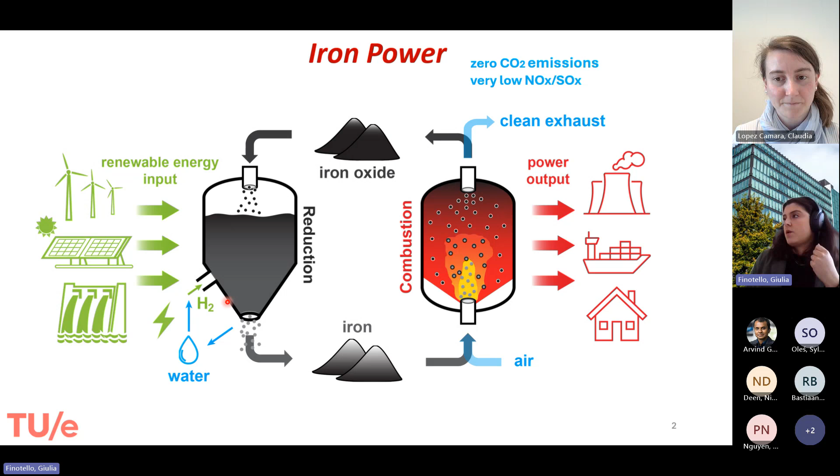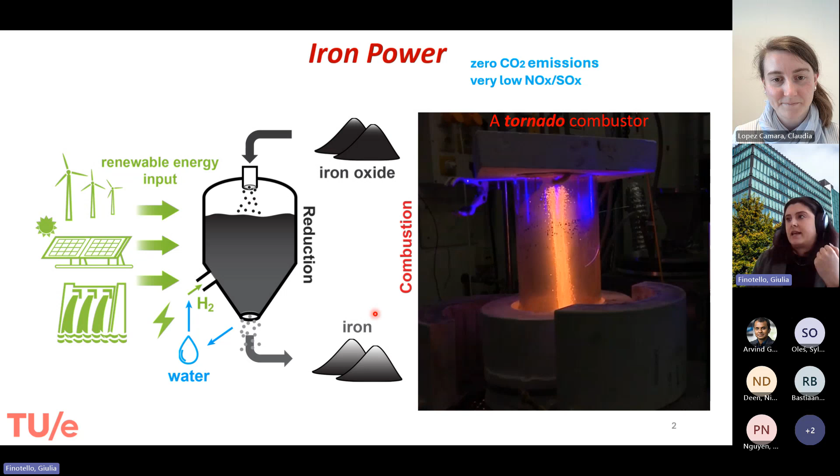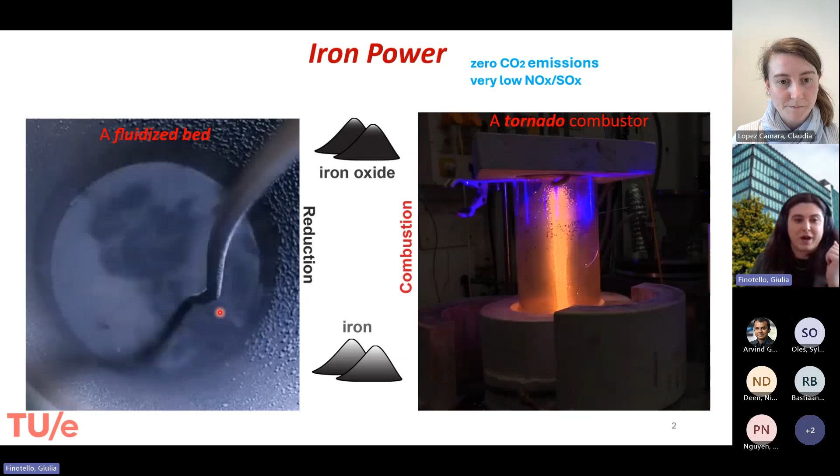So from my colleagues, I just show a picture here of a very beautiful tornado combustor that they developed. And then here for the reduction side, you can see at the top of a fluidized bed, what you see is this bubble that is the gas coming through the particles. So the particles are mixed, and the heat and mass transfer is enhanced by this mixing and this motion of the bed. And what you see here is just the tube for the thermocouple into the reactor, nothing strange.

Okay, and what are the key benefits of this iron power? As I said, we see it as a sustainable energy carrier because especially for iron, we can release chemical energy, but we can also collect back the powder in the solid state so that it can be regenerated. So that's really used as a sustainable energy carrier. As I said also before, we have no direct CO2 emission.

And we can produce heat for industrial processes due to the fact that iron has a high energy density. Another component of this cycle is that it's a circular process. We know we've seen this is a cycle, but it's actually something that needs to be demonstrated, which I will talk about in my talk later on.

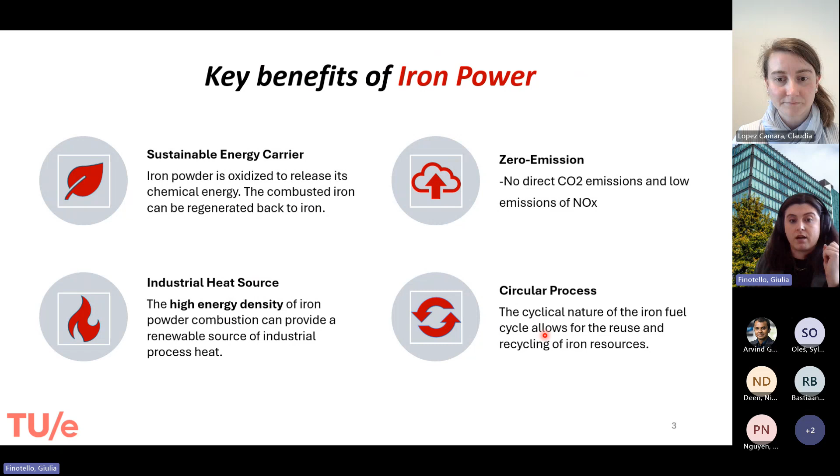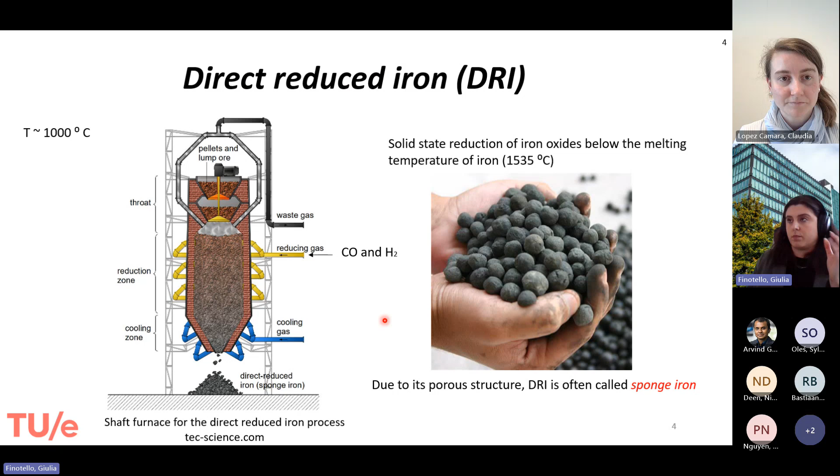Let's get more into the reduction processes available. We know already from the steelmaking industry about direct reduced iron. This is done in a shaft furnace, where we have solid state reduction of iron oxide. In these very large facilities, pellets and lump ore are introduced, and the reducing agent can be hydrogen or a hydrocarbon mixture with CO and hydrogen. Temperatures are relatively high, and what we produce here is direct reduced iron, or sponge iron, called this because what you produce is a very porous iron ore—you can even see larger cracks in the picture. So it's very porous. This is indeed one of the techniques used to regenerate mostly larger pellets.

Here I give an overview of all the current steelmaking technology solutions available. I'm not discussing the very low TRL niche technologies for now. This overview puts all these alternatives together—we have the shaft furnace here, and the technology readiness level here, together with other properties. What's important to see is that while the shaft furnace is already widely used and has a high technology readiness level, below we have fluidized bed reduction, and then three other techniques: suspension iron making technology, which occurs at very high temperature so the reaction can go very fast, but has a lower technology readiness level. The same goes for plasma reduction and electrochemical reduction—these have much lower TRL than fluidized bed and shaft furnace.

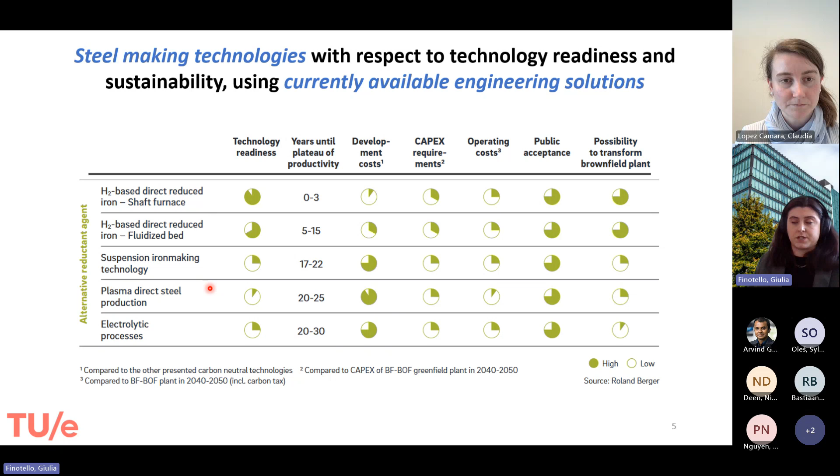If we look at all these technologies, there are of course pros and cons, and we will look at these for each. What you see here is these technologies put in perspective of increasing temperature—if you increase the temperature, your reduction rate increases, so you can do reduction faster. You see here we pass from reduction times of days to milliseconds, so the reduction time decreases a lot. If we look at energy efficiency and reduction rate, we can think maybe there is an optimum technique. However, it's very difficult to identify such an optimum, and if we tend to exclude one of the techniques, we limit our possibility to really explore what we can do to regenerate iron oxide, both for the iron cycle and the steelmaking industry.

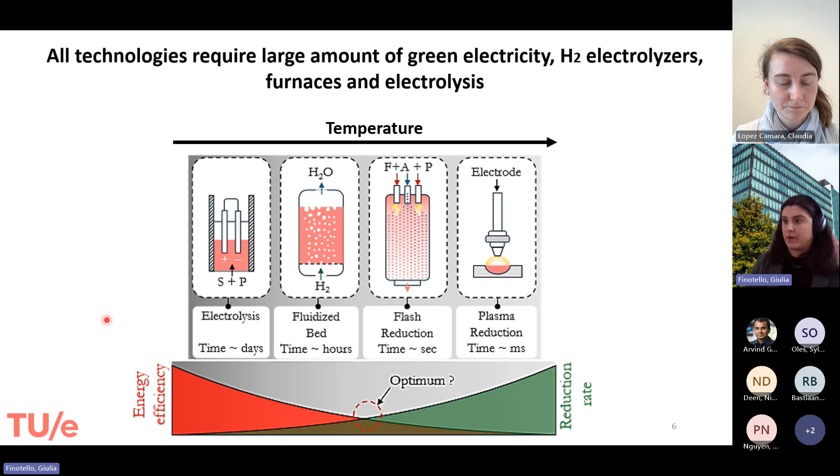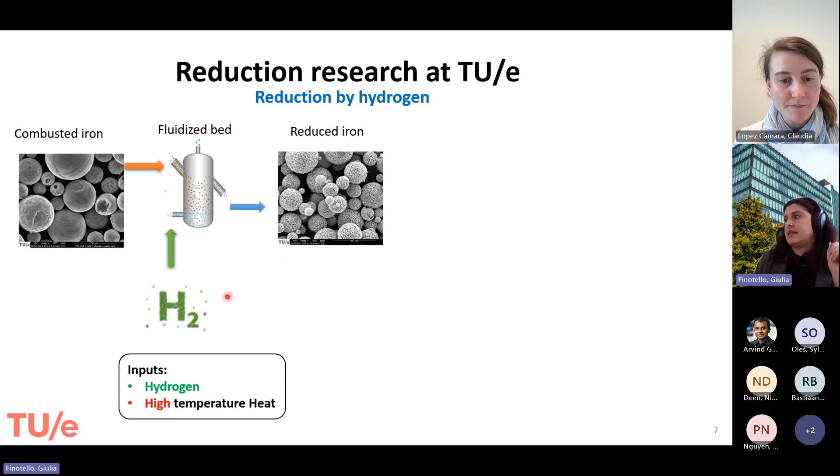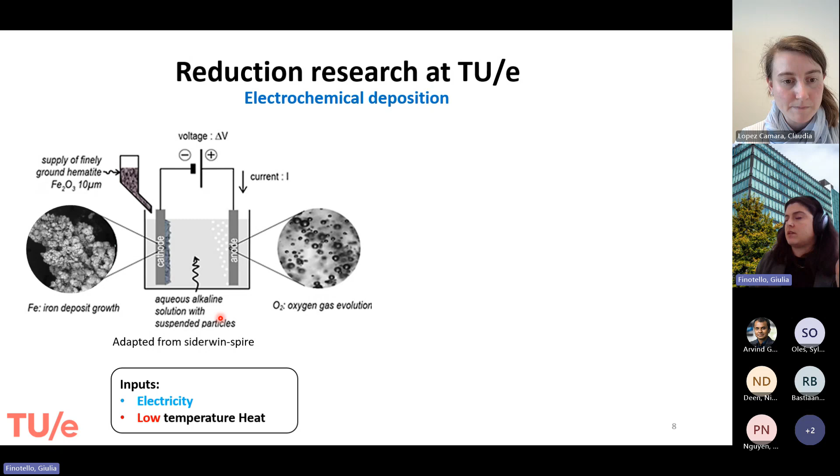However, we are also looking into electrochemical deposition—a totally different technique. An alkaline solution with suspended particles is used, and with an electrochemical process, you have deposition of iron at the cathode. The typical iron deposit has this crystalline structure. In this case, you don't need any hydrogen, but you need electricity and low temperature heat—we don't go above 100 to 110 degrees because we don't want evaporation of the aqueous alkaline suspension, which I'll touch on later. We're doing this in a parallel plate, a very simple but effective electrochemical cell, and we're also developing rotating disk continuous reactors to help with scale-up.

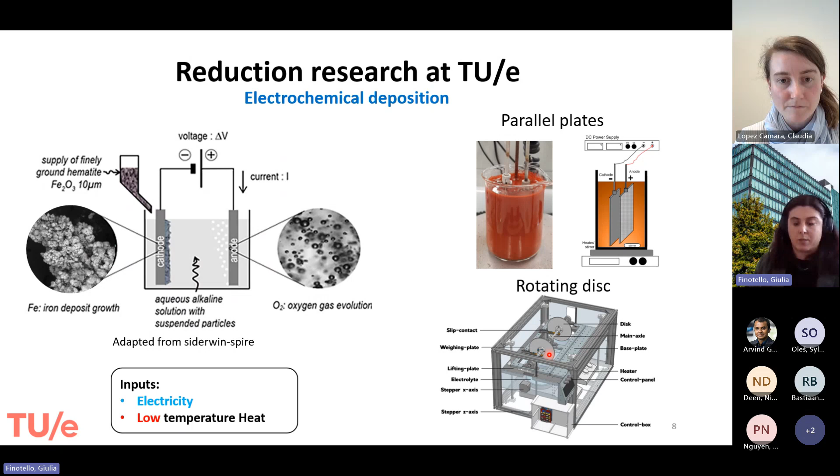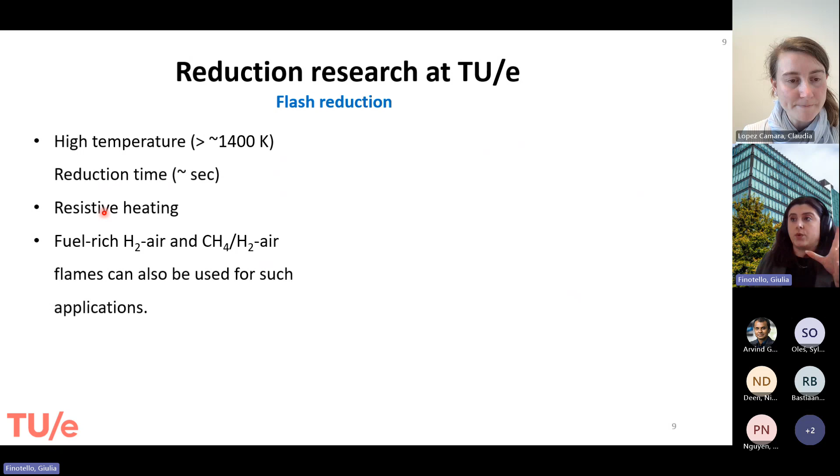We also started very recently with my colleague Giulia, the flash reduction process, which occurs at very high temperature, where you can reduce the reduction time to a second. We can do it with resistive heating. Indeed, we are developing a drop tube reactor with resistive heating, where we want to do very controlled experiments to look into the kinetics of reduction at such high temperatures, which are still very much unexplored.

Potentially you can also do it with a hydrogen-air or methane-air hydrogen flame to reduce that. What you need, of course, is hydrogen again and very high temperature heat.

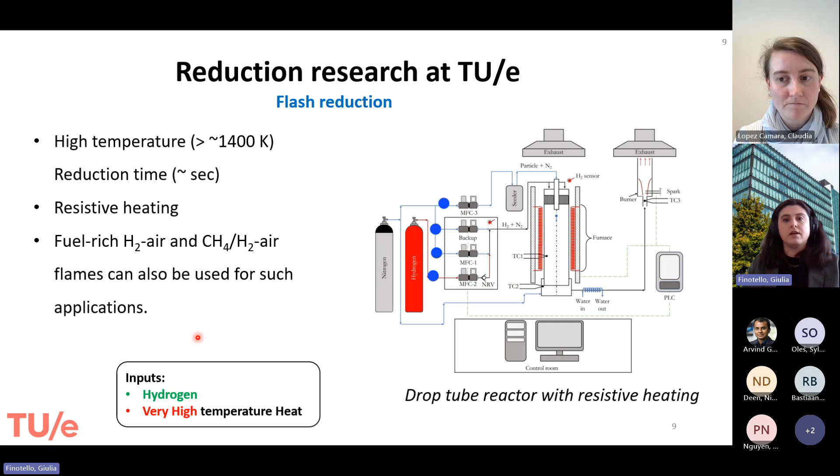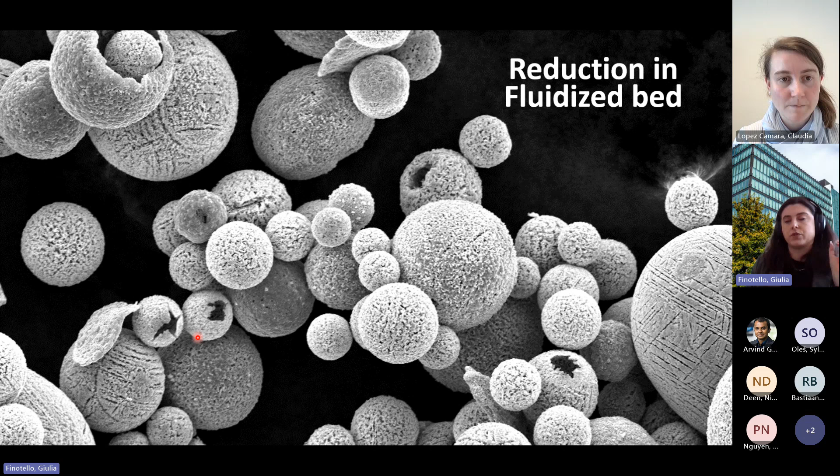So let's have a look at the reduction in a fluidized bed. In this case, you need hydrogen, and you also need heat to provide temperature, around 500 to 900 degrees. At the mesoscopic scale, the mechanism of transport follows several different steps.

First you have the transport of the gaseous reactant from the bulk gas phase to the surface of your iron oxide particle. Then you have diffusion of the gaseous reactant through the pores to the internal surface. Then at the surface you have the reduction of the iron oxide, and with that you see the formation of iron on the outside layer, while inside you still have, in this case, wüstite.

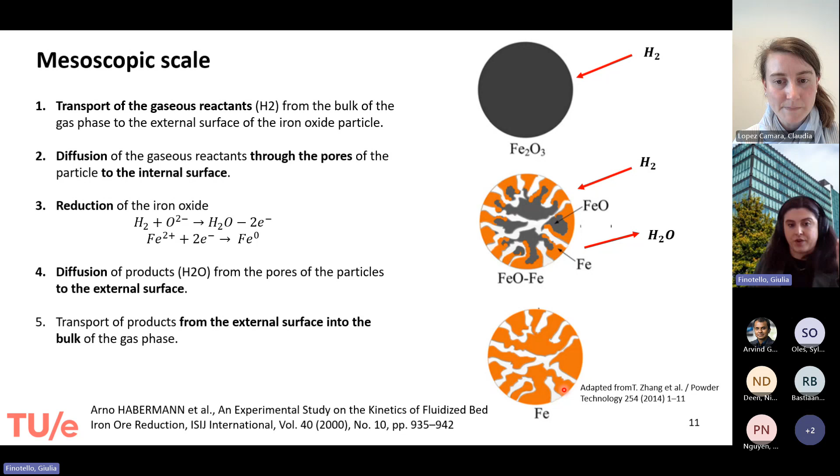Then the product, which is of course water vapor, needs to diffuse back from the pore to the external surface. And then you have the last step, which is transport of the product from the external surface back to the bulk. What you end up with, again, is what I showed before, a very porous structure of an iron particle.

If we look into the reaction, we have different reaction steps. Below 570 degrees we have what we call two-step reduction, and above that we have three-step reduction. This is because wüstite is stable only above 570 degrees, and below that we don't form any wüstite.

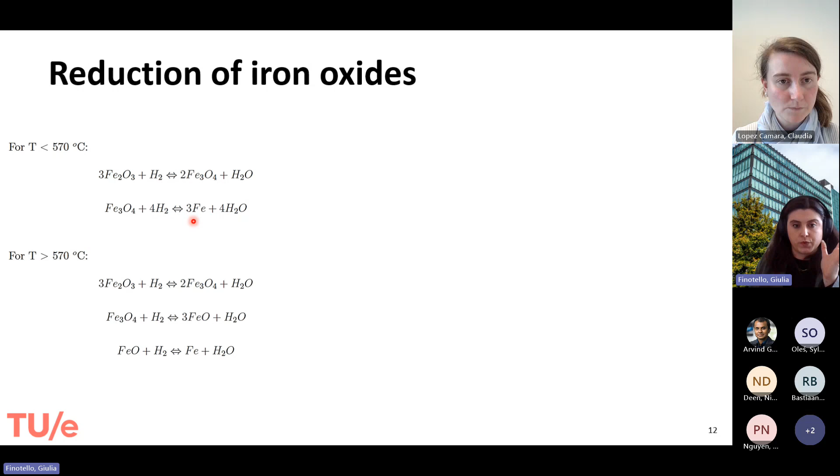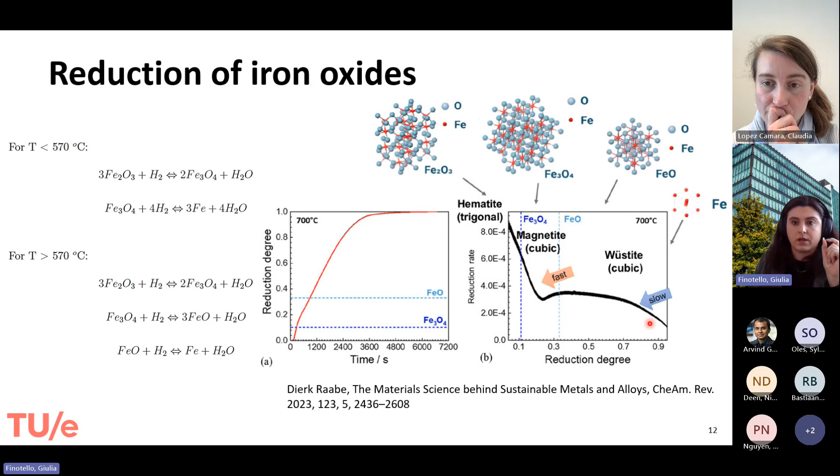So that is why this reduction can take a longer time. My colleague Konrad Hessels, who is also an assistant professor in my group, did a TGA experiment. We put the powder in a crucible and let the hydrogen flow through it. It's a static bed, and he did this for different temperatures: 500, 700, and 800 degrees.

He also tested different hydrogen concentrations. Of course, when we provide a larger amount of hydrogen, our reduction rate is faster. However, what we see is that at high temperature, we can also reach a high conversion rate. However, it seems that the second step is very slow.

This is where diffusion comes in. That's really the limiting step, together with the fast formation of a very solid iron layer on the surface of our particle. Moreover, if we go to a very high temperature, at 800 degrees, we can also see sticking of particles. They start to create a solid bridge, and that's what the characterization, the analysis, the SEM images showed clearly.

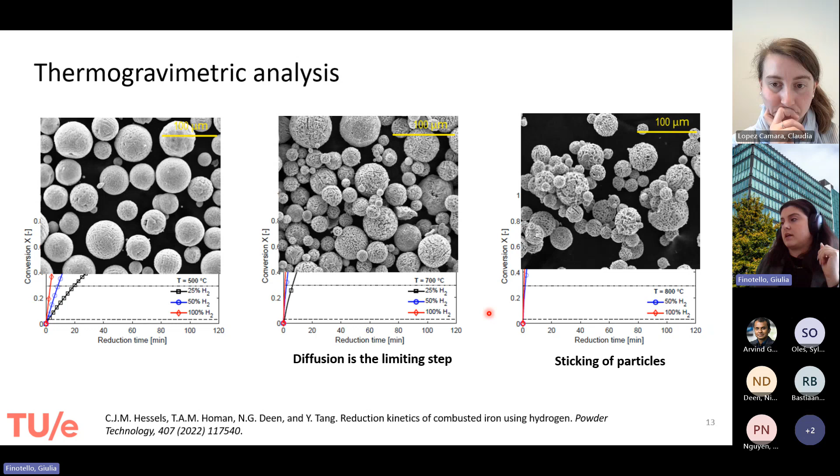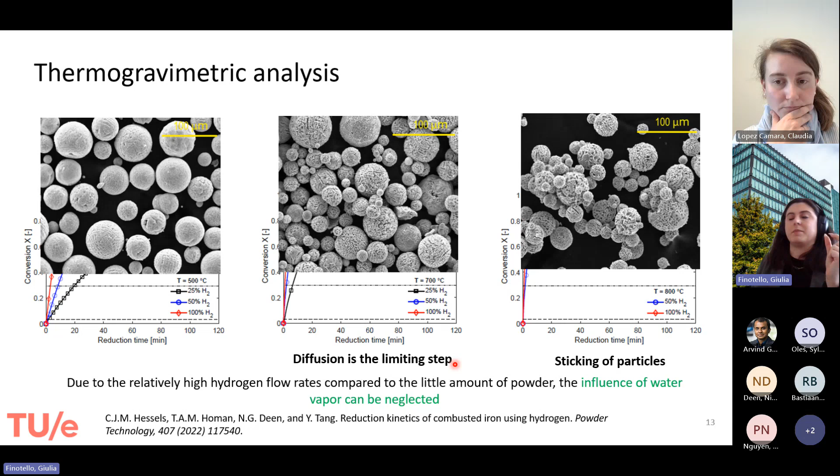I think that wasn't done here and was neglected, because in this case it was not important. The amount of water vapor could be neglected in the TGA, because it's a very peculiar system: you are removing all the water vapor very effectively, and you have a limited amount of powder. However, can we really say that we can neglect the water vapor in a practical system?

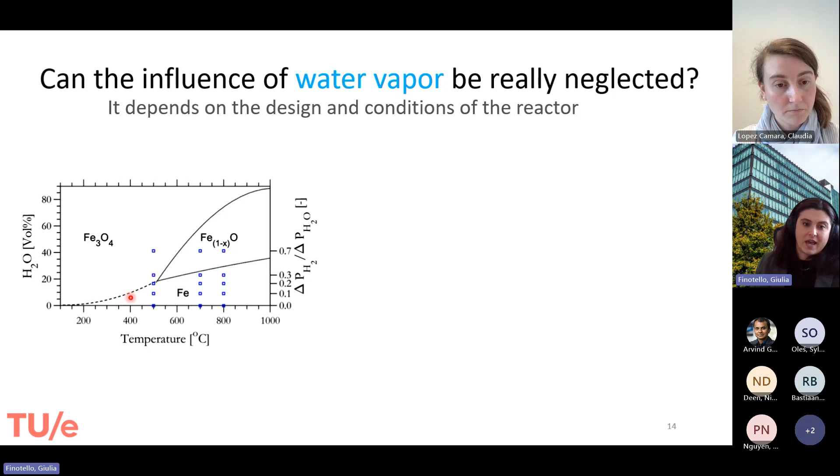What it really is depends on the design and condition of your reactor. If we look at the thermodynamic plot, we can see that especially for lower temperature, because we're talking about equilibrium reaction, if we are doing reduction at lower temperature and we increase the water vapor content, we end up shifting the reaction towards magnetite and not towards iron. So we shift the reaction toward hydrogen and magnetite production.

That tells us that if we're able to remove the water vapor, if we work with excess hydrogen, we're doing things correctly. But if, for example, we recirculate back our hydrogen and water vapor stream and we don't do this in a good way, we reintroduce some water vapor, it means we didn't optimize our fluidized bed, and even a small amount of water vapor can have an effect on our reduction kinetics.

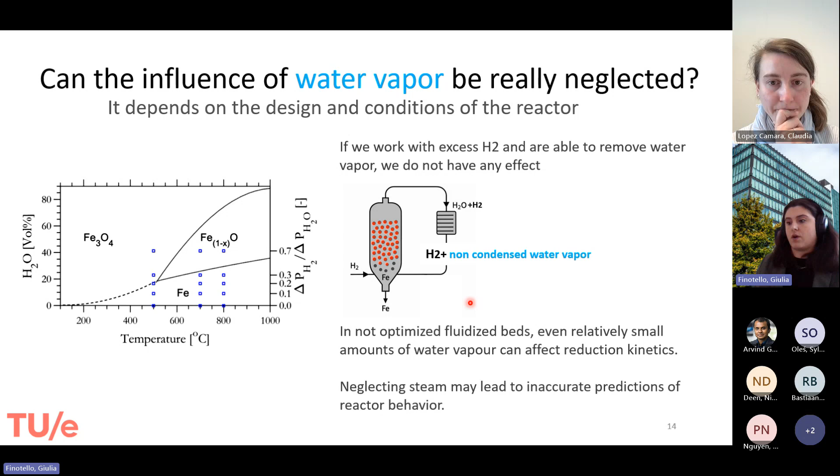That's indeed what we've seen with other TGA. So this is again, you can see at 500 degree temperature, the conversion at different partial pressure of water vapor over the hydrogen. You clearly see that if we increase the partial pressure, we have a lower conversion because, as I said before, we're talking about equilibrium reaction.

Here is the same message. If we increase the partial pressure of the water vapor, we are decreasing the conversion, and this is even more true for the low temperature. For the larger temperature, there is a decrease, but it's not as much as the decrease you see for 500 degree Celsius, and this is indeed expected from the thermodynamic data.

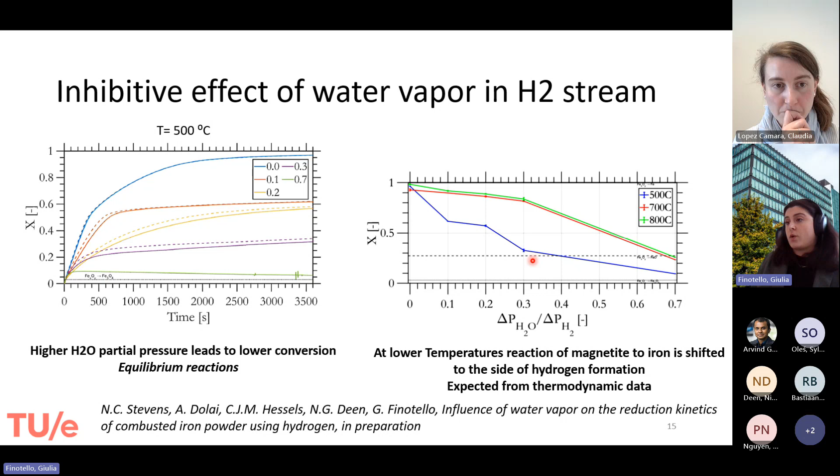Okay, this is all interesting, but there is an elephant in the room, which is the issue of sticking during the reduction of iron oxide, both in the fluidized bed as well as the shaft furnace. That's a persistent challenge in the fluidized bed reactor, the sticking—the clustering of particles that stick together.

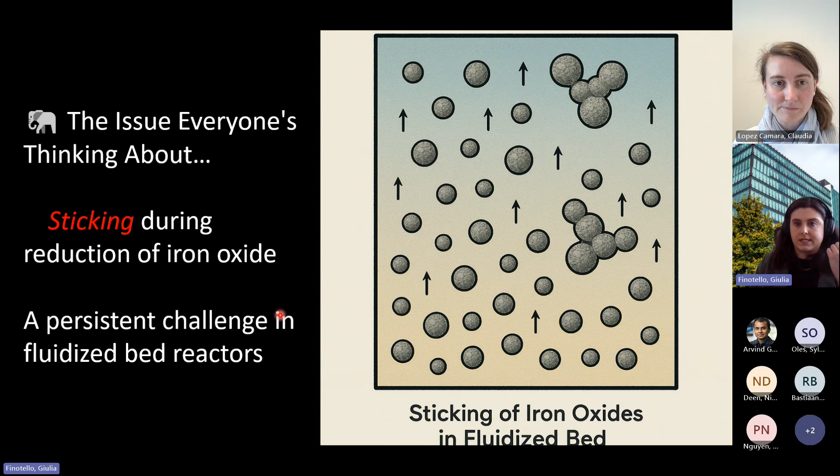What in practice do we see? Why don't we want this sticking? Well, because we can have defluidization at high temperature. So what we usually do in the fluidized bed is look at the pressure drop over time, the pressure difference over our bed.

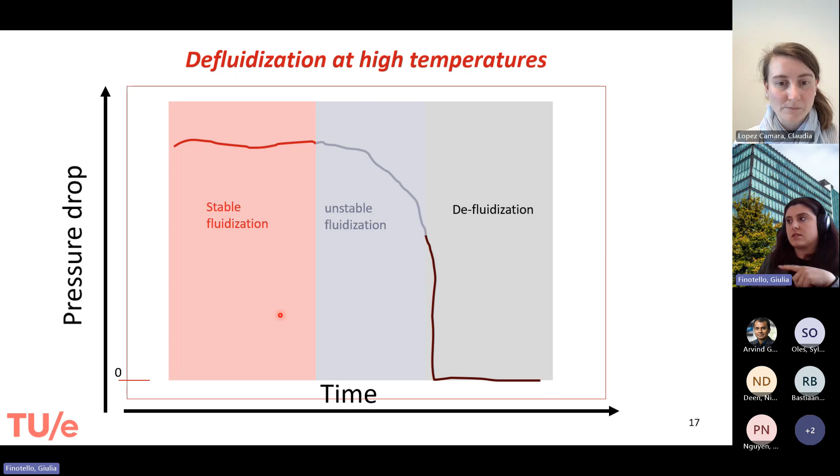If everything goes well, we have stable fluidization. If something starts to go wrong, it means we're experiencing some sticking, and we see a certain drop, an unstable fluidization, until we see a very fast drop, and that's where we reach defluidization. In this situation, it means our bed is not moving at all.

Of course, you don't want such a thing in a real operational condition, because that means you need to stop your reactor, clean it, and start it again, which in a continuous operation is something you don't want. So although this is a very complex mechanism, we looked a bit into that.

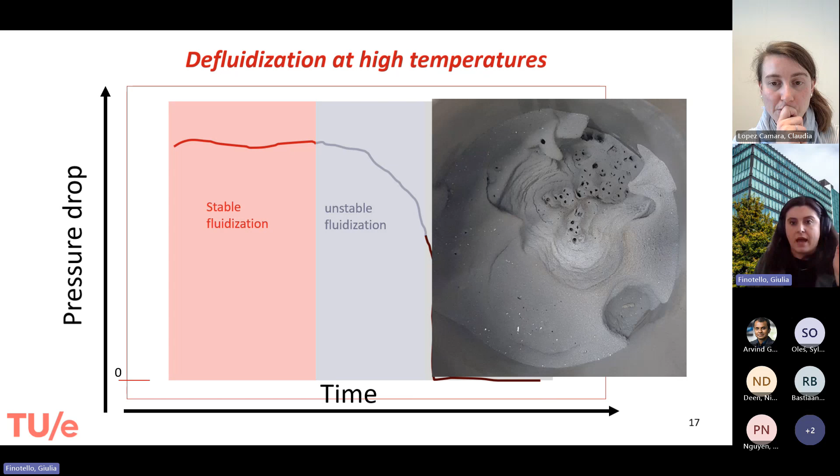This is of course due to the interaction between the particles, and more about the balance between the collision forces and the cohesive forces. So cohesive forces tend to leave the particles stuck together, and collision forces are the forces of collision.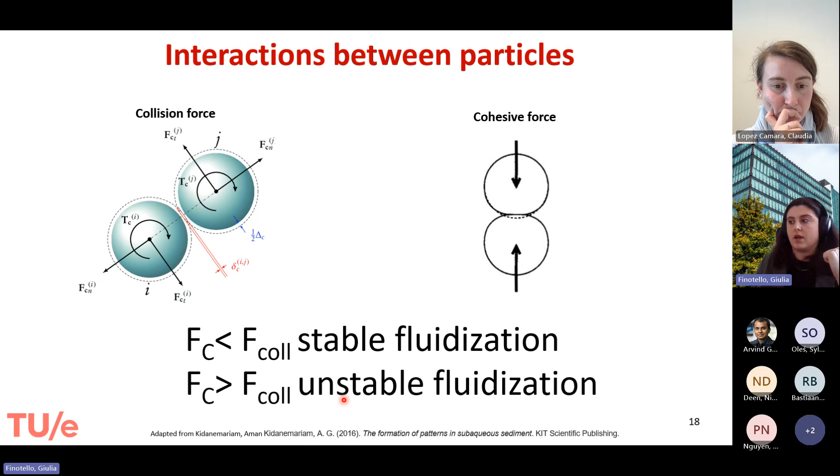If we have cohesive forces that are smaller than the collision forces, then we have a stable fluidization. If the cohesive forces are generally larger than the collision forces, then we have an unstable fluidization, which can end up in a full defluidization.

So again, my colleague Konrad Hessels, during his PhD, did some measurement of these interparticle cohesive forces—this solid bridge, which is the formation of this neck over the particle, as you can see represented here by the schematic. Look into the strength of the cohesive force, which is proportional to the strength of the neck and the length of this bridge.

And then what we did, following this equation—these are all properties of the material—we did measurements at different temperatures and at different sintering times or contact times.

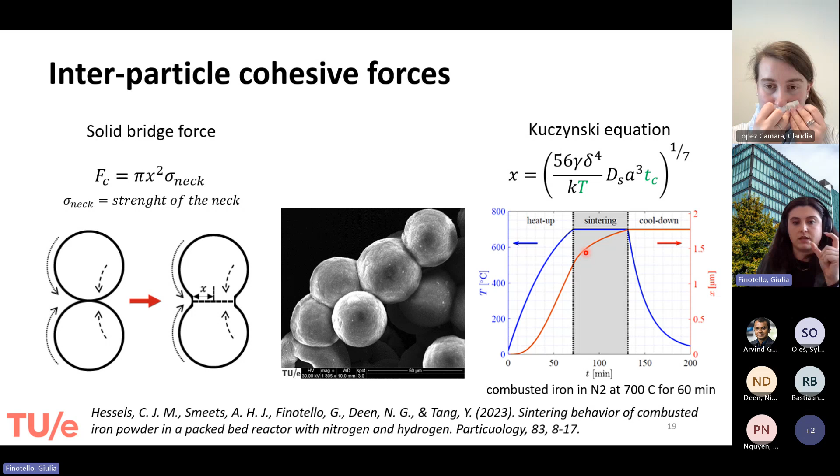And you can already see here that the neck is growing when you are increasing the temperature. So what we did was to make some samples in a crucible, let it sinter under hydrogen - we did nitrogen too, but under hydrogen we let the particles sinter together, and then we did a compression test, correlating the force needed to break the sample.

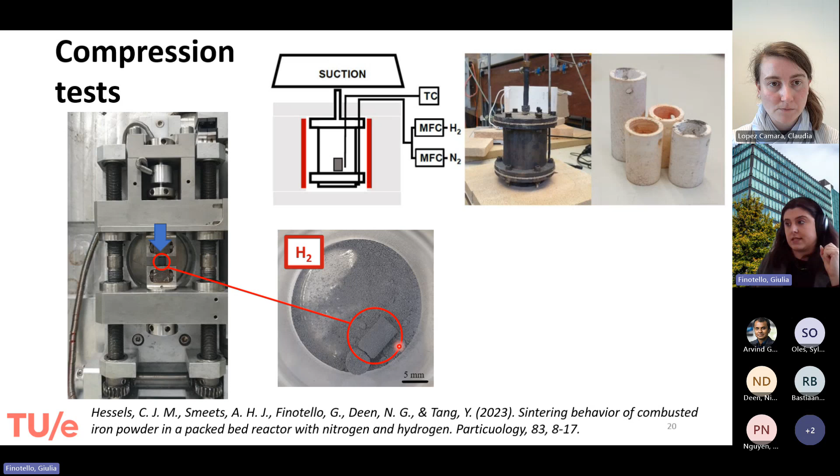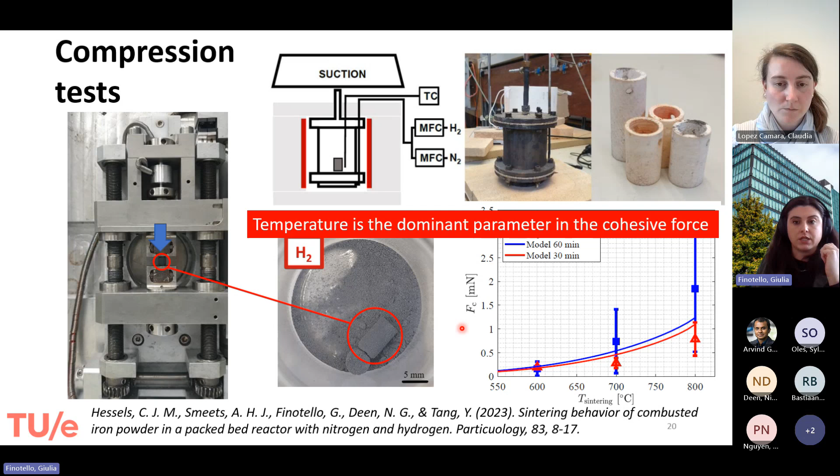That was a measure of our cohesive force. We found that the time of sintering, whether we did a performed experiment for 30 or 60 minutes, didn't have a large effect. The temperature has a dominant effect, which is really critical for this problem.

So to finish up with the fluidization part, we also did reduction conversion experiments for 1 hour at different temperatures, and also at different U/Umf, increasing the flow rate and fluidization velocity. You can clearly see all these red points are experiments where we experienced unstable fluidization, in some cases leading to full defluidization, while at only 500 degrees we still have stable fluidization. So we have a map where in some regions cohesive forces are larger than collision forces, and in others cohesion forces are lower than collision forces.

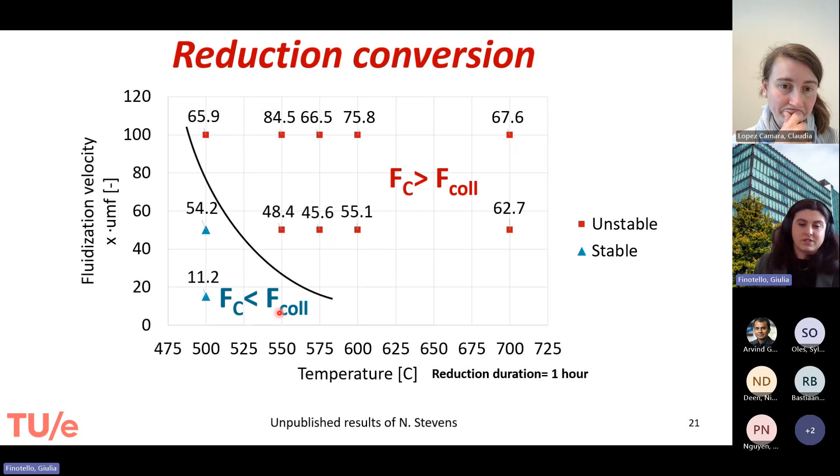So we see that we can avoid defluidization only if we stay at very low temperature. However, even if we avoid defluidization, agglomerates or clusters of particles are formed. At the particle level, we always see some agglomerates forming.

So the question was: can we recycle such a powder? Because our powder needs to go through a cycle of combustion and reduction. Can we handle this powder so that we can perform multiple cycles?

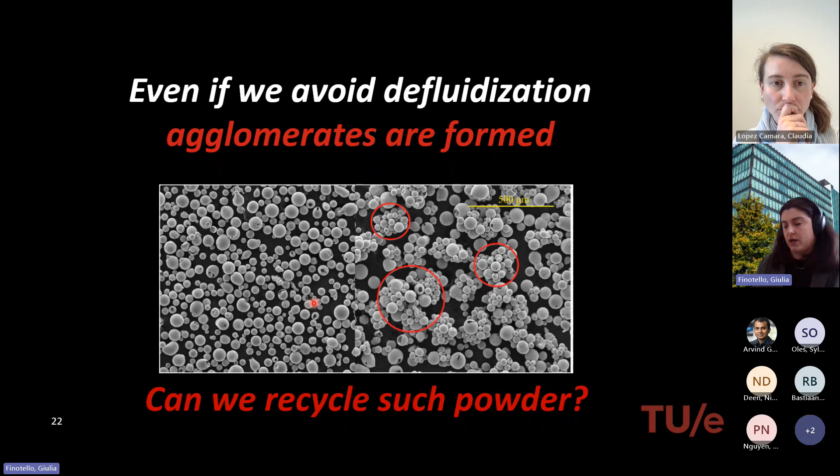We did this - first 3 cycles of reduction and combustion, and here you can see part of the result, the particle size. This is the initial particle from where we started, then we did a cycle of combustion and reduction. So C1 is the first cycle of combustion, first cycle of reduction, and so on. Indeed, we see that there are changes.

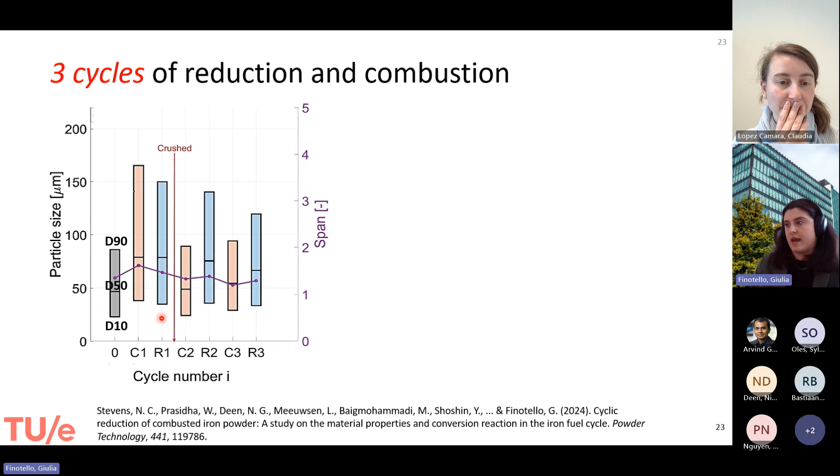Of course, there is agglomeration in both combustion and reduction. However, it is still an acceptable distribution, because if we calculate the span, it's lower than 1.5, which is related to relatively acceptable flowability. We also saw an average storage efficiency of 83%. This was really the first trial, the first 3 cycles that we did.

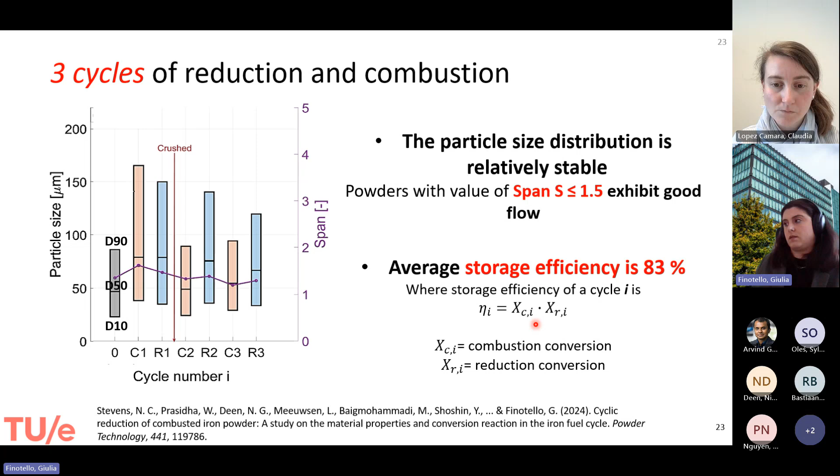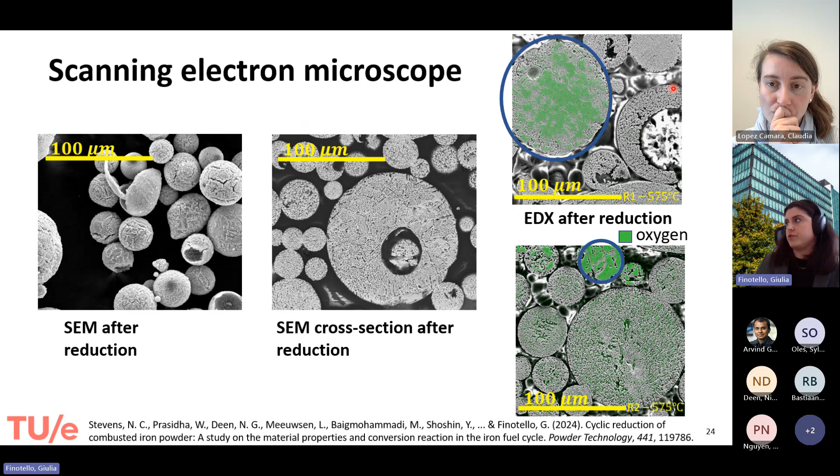Here you can also see some SEM images, even the cross section showing the porous structure of the reduced powder. However, we've seen that we couldn't reduce fully - there was still some oxygen in some particles, while others were fully reduced.

We didn't stop here - we also did a 10 cycle follow-up study. Here you can see the composition for both the recycled, reduced iron and the combustion product. We were mostly interested in the stability across different cycles, and here you can see that we could maintain a certain conversion, a certain iron composition in our reduced iron, and the same for the combustion product.

So we don't observe any large difference in the composition from cycle to cycle. The same is true for the stability of the flame, for example, from the first cycle to the 10th cycle.

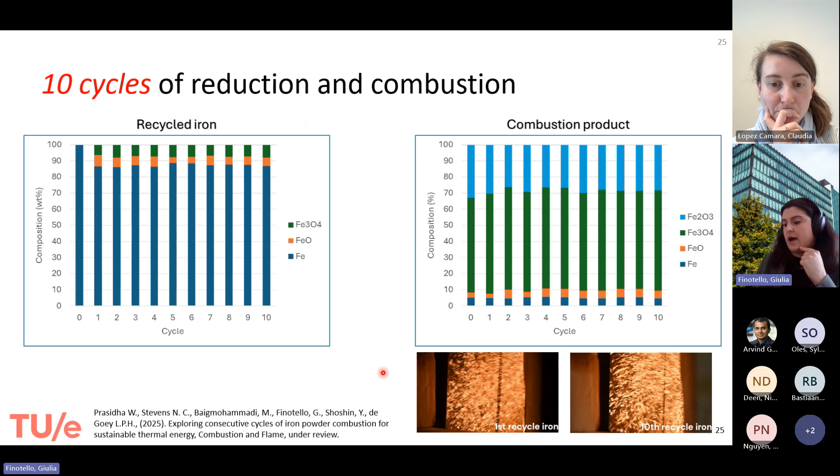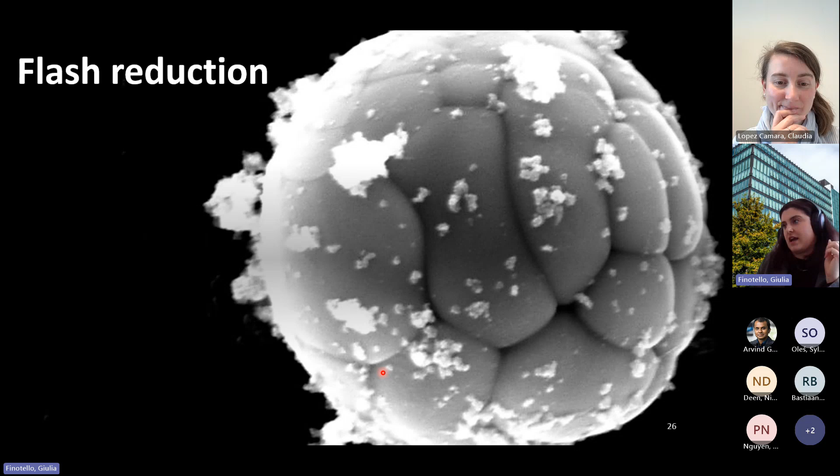That's it for the fluidization, but I still want to tell you about flash reduction - reduction at high temperature, which we are studying because it has the potential to reduce material in the order of a few seconds. That's why we are looking into it. As I said previously, we are building our drop tube, so we don't have experimental results yet, but we have done some modeling, some theoretical understanding of what the design of a reactor for such a technology could be.

From the postdoc that Professor Xiaocheng Mi and I are supervising, you can see here the drop tube schematic. We introduce a single particle of our iron oxide, along with fuel and air. In our case, it's a hydrogen or hydrogen-methane and air flame.

The particle is falling down in the drop tube, into a flame. Here we have the premixed flame, and here the burnt gas, and this is the length of our reactor. We are doing this with an Eulerian-Lagrangian model and 1D flow.

We also assume that the particle doesn't affect the gas, since we are considering one particle at a time. We're also using the reduction rates that are available, though there are still limited studies in this sense.

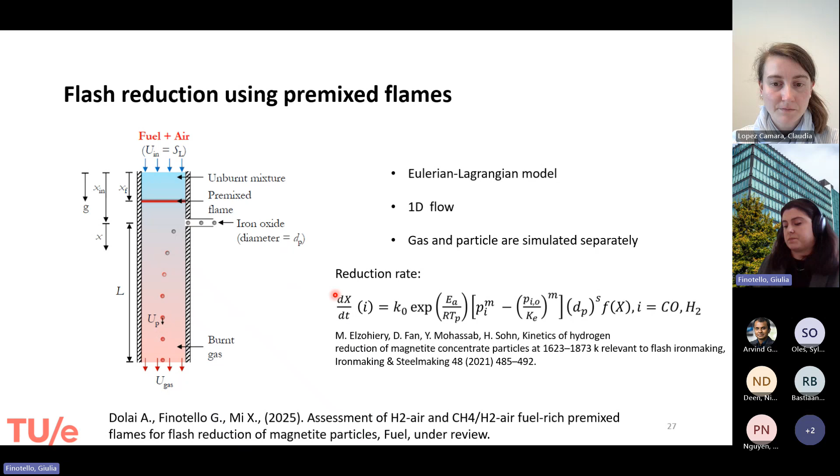What we did first was define a regime map for this hydrogen-air flame, showing equivalence ratio and inlet temperature. If we are below in this orange region, reduction is not possible because the partial pressure of water vapor would be too large, and at equilibrium the reaction would shift to the opposite side from what we want.

In this green region, reduction is possible, but the temperature is above the melting temperature of iron. Therefore, we don't have any kinetics available in the literature.

In this blue region, we have kinetics that are available, so it means we can do something with that.

We decided to simulate only this part, and with this model we could predict the reduction degree, simulating this region 3 on the top, with inlet temperature and equivalence ratio.

You can see that you can reach a higher reduction degree at higher temperature and higher equivalence ratio.

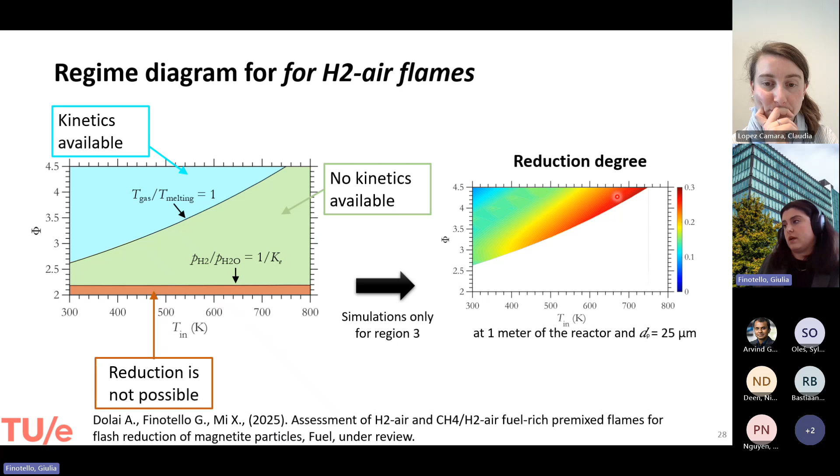This is a model that can be used, for example, to predict what the reduction degree will be for a particle at the end of the drop tube reactor, but it can also help in designing new reactors.

It can tell us, for example, what length you need for a specific particle to reach a certain reduction degree. And as you might imagine, if you decrease the size of the particle, you can reach a larger reduction degree within 1 meter, at least for this graph, of reactor length.

This gave us the idea for a very preliminary experiment, but I thought it was nice to share, because why not share new things?

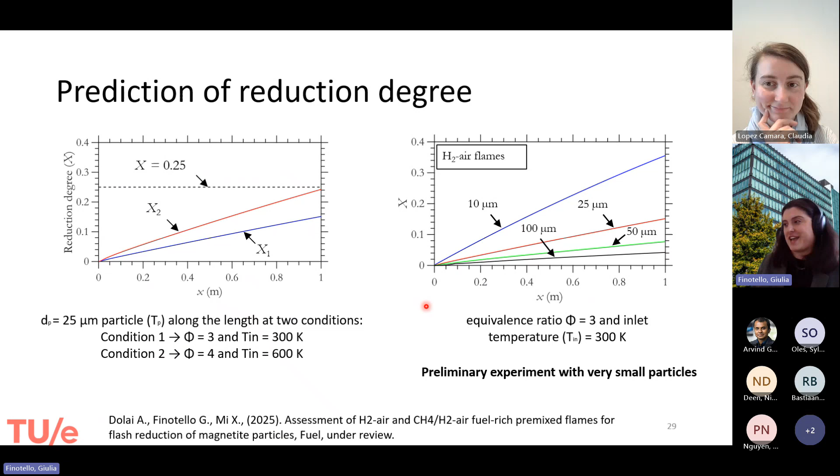So we chose a very small particle. We don't use a drop tube because, as I said, we still don't have our drop tube. So we introduced some very small particles, on the order of 1 micron, into this other reactor's flame, along with hydrogen and air.

Here you can see the powder before reduction. We have a relatively broad size distribution.

And here you can see the powder after reduction. You can already see that it has some melting, because you have very spherical particles, and you also see some sintering from these SEM images.

We also did some XPS, where at least at the surface we could find some Wustite percentage, indicating some reduction. Of course this is very preliminary, but it's indeed a sort of initial proof of concept for this very fast reduction process.

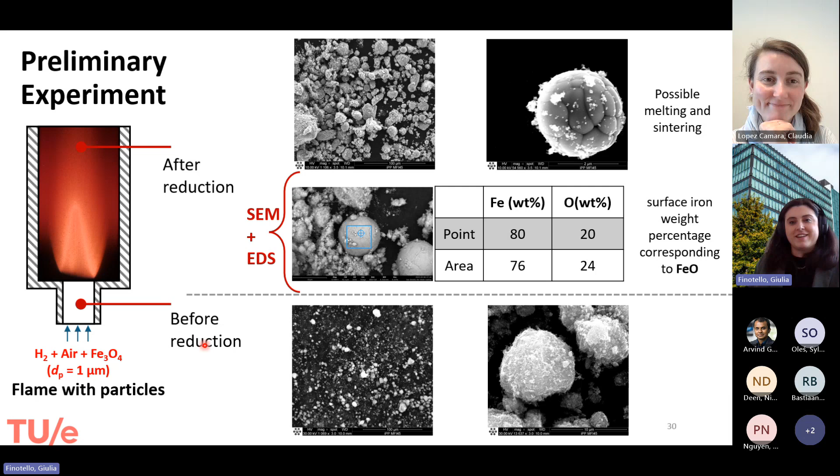I still have a little time to introduce another topic that mainly my colleague Professor Yali Tang is working on: electroreduction. You can see here a very beautiful image of the crystal deposit that you can produce with this technique.

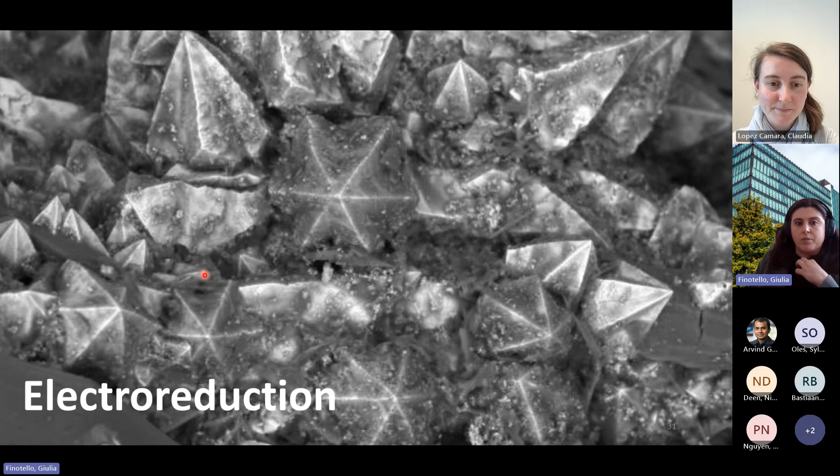Briefly, we first started with a very simple electrochemical cell with hematite, which is why you see it's so red, and we could obtain a certain dendritic growth over time.

You can clearly see that with time there is a certain growth of the deposit, and here you still see red because it's not clean and dried. In the final product, when the cathode is clean and dried, you can see the dendritic growth especially on the side. This is really iron.

This is what we also see here from the same picture of the cathode. And if we have a SEM image, you really see the formation of these dendrites, which have a crystalline structure.

We also know that we can tune this crystalline structure a bit depending on the conditions in which we are doing this electrochemical reduction. And from what you can see here, we have EDS, and you can see that it's mainly iron. So we are really able to deposit iron.

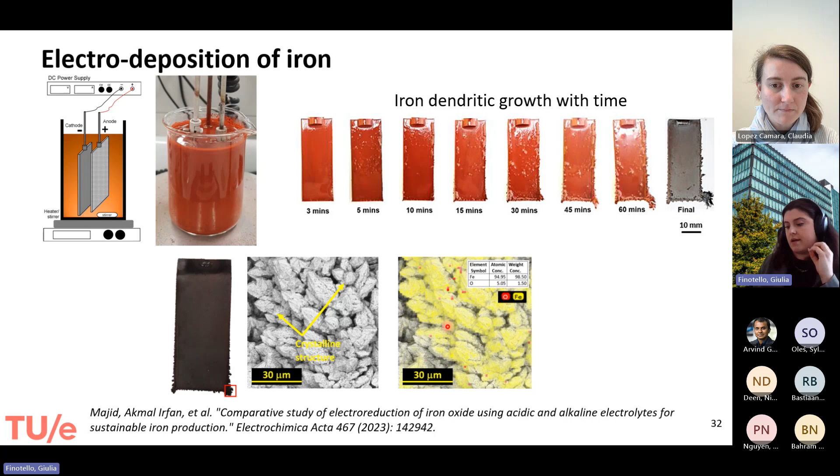So if we look into, well, this is really an example from the video of how the deposits are harvested. These are really the dendrites that are produced, and you can see that we are just scraping off this iron that is produced. Under certain conditions we can reach a current efficiency of 80 to 90%, which is actually a very good current efficiency.

Just to go through some pros and cons, without talking too much about this: the pros is something I already said. We are using relatively low temperature, we don't go above 100 or 110, and we have a shorter production chain because we don't need hydrogen for this technology.

However, we are still currently at a low TRL, and we also need to consider that if this iron deposit needs to be reintroduced in combustion, we need a very optimized harvesting system, and formation of particles that can be introduced into a burner where we can combust them. So these are a little bit the disadvantages for this technology.

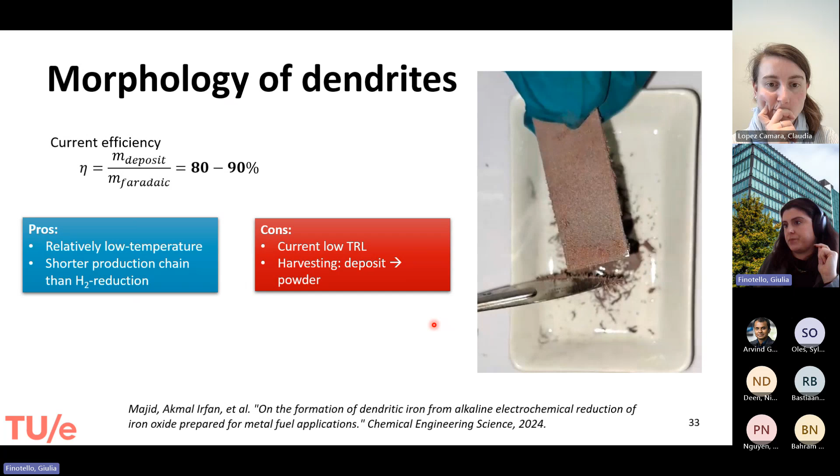I mentioned before that we are also looking into the continuous production of this iron powder, because of course with an electrochemical cell you can use it, but then there is the need for manual harvesting of the powder. We are looking into a solution in which we can do production and harvesting in a semi-continuous way.

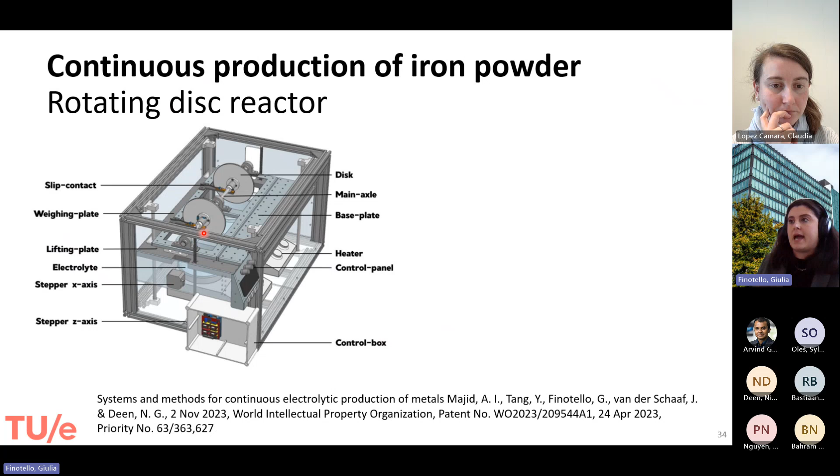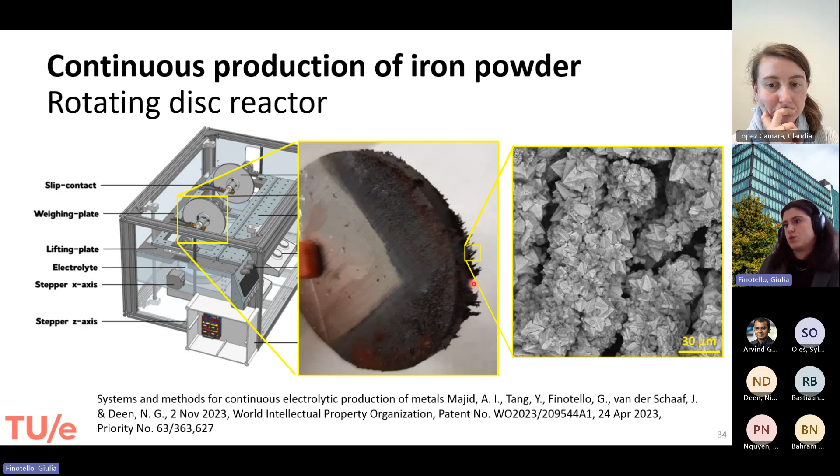That's why we introduced the concept of this rotating disc reactor, where part of the disc is, for a certain time, immersed in our alkaline solution suspension, and then at another time this iron that is deposited on the disc—the disc can simply turn, so it gets out from the solution, and the deposits can be harvested in this way. Okay, and that brings me to my key messages for today.

I think that we need a comprehensive investigation of all available reduction technologies. My recommendation wouldn't be to exclude any of these technologies, and the reason is that these entire fields share some fundamental scientific questions—if we know more about all these technologies, we can know more about their reaction mechanisms, their chemistry, the microstructure formation. So we are addressing fundamental scientific questions which are common across this topic.

As a scientist, as a researcher, we have the responsibility to explore different technologies instead of just fixating on the blast furnace, because that's what we know and that's what we're going to do for the rest of the year. But if we really want things to change and to reach a higher TRL, we have to invest in it—invest time, researchers, and money, of course.

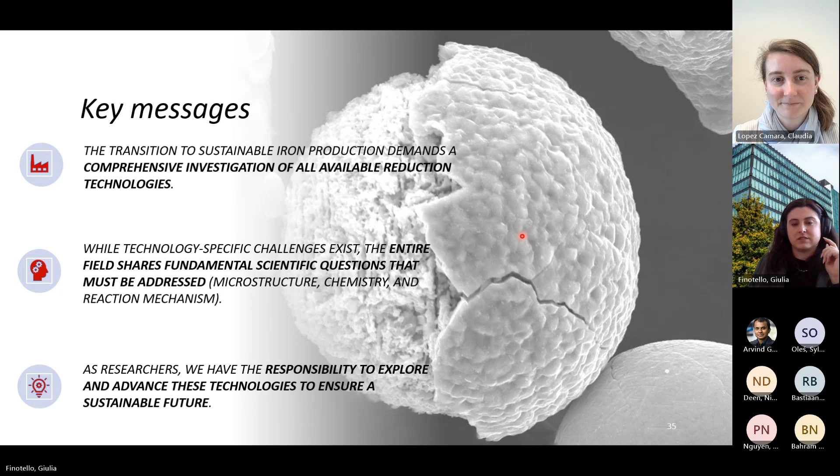Last slide. So what we are doing now—as I said, I'm not alone in all of this. There is a group of PhD students and colleagues who are working on this.

For the fluidized bed reduction, we're still looking at optimization of the reduction in a fluidized bed and scale-up of the technology. We are also looking at other cost-efficient feedstocks in a project together with Professor Xiaocheng Mi. We are going to do combustion and reduction of different feedstocks to see if they are feasible for the iron power cycle.

For the flash reduction, as I said, we are developing this drop-tube reactor where we're going to investigate the kinetics of the reduction at such high temperature in a very controlled system. And for the electrochemical reduction, we are currently doing dedicated experiments to really identify the electrochemical mechanism of reduction, which is currently also limited in understanding.

So yeah, this is it for today. I didn't go so long in time, so I'm happy that I managed within the time that was assigned to me.